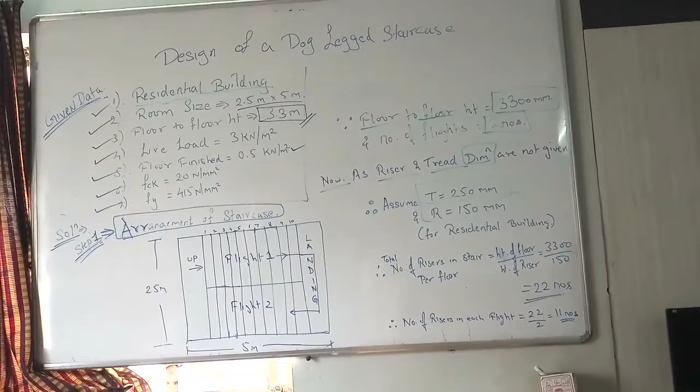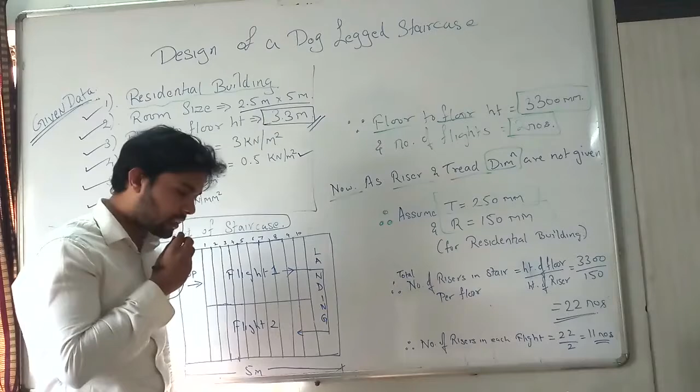Previously we discussed the basics of design of dog-legged staircase. We are preparing for two types of staircase in our syllabus: the first is dog-legged staircase, and the second is open well staircase. We have already discussed the dog-legged staircase and its design steps, including what formulas and steps are required.

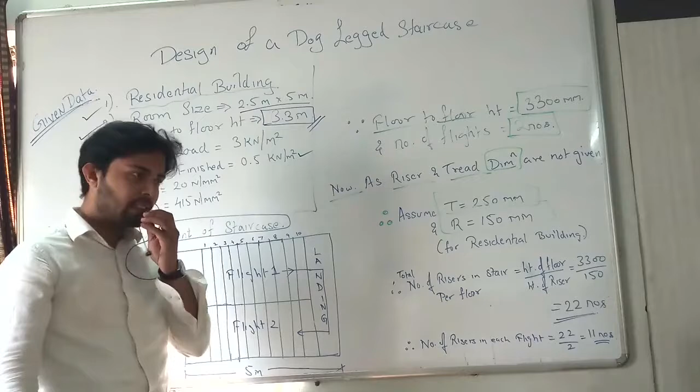A staircase consists of two flights, separated by a landing.

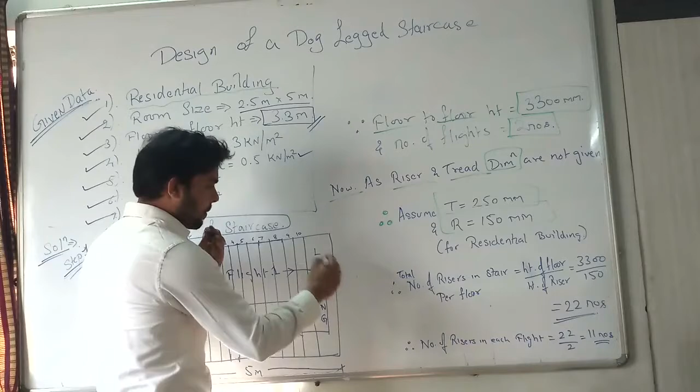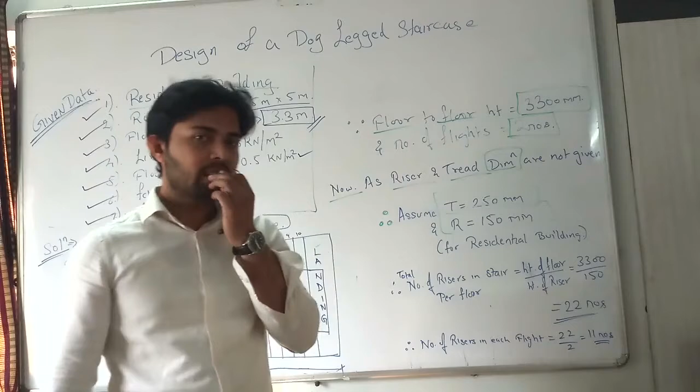Now one more thing about dog-legged staircase: both the flights consist of equal number of steps, whereas in open well staircase the conditions are different. So in dog-legged staircase, remember: it consists of two flights, Flight 1 and Flight 2, running in opposite directions, separated by a landing, and both flights have an equal number of steps.

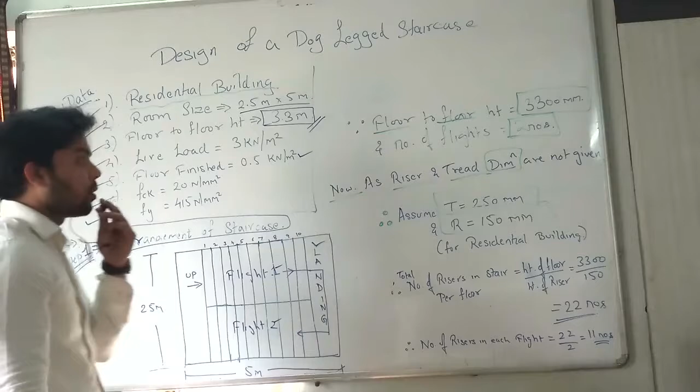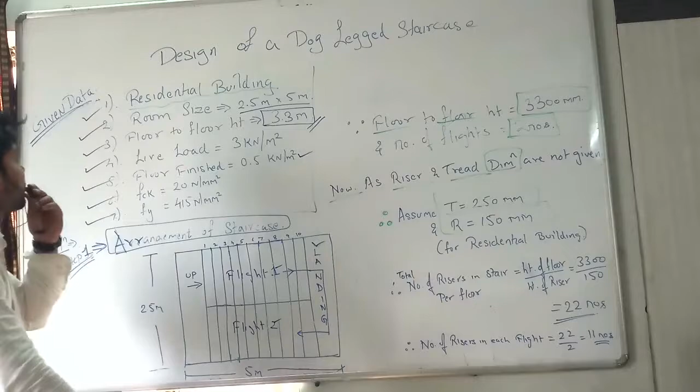Since we have already discussed the steps before, we will directly move towards the numerical for design of dog-legged staircase, for which I have already entered some data. Let's go through it one by one.

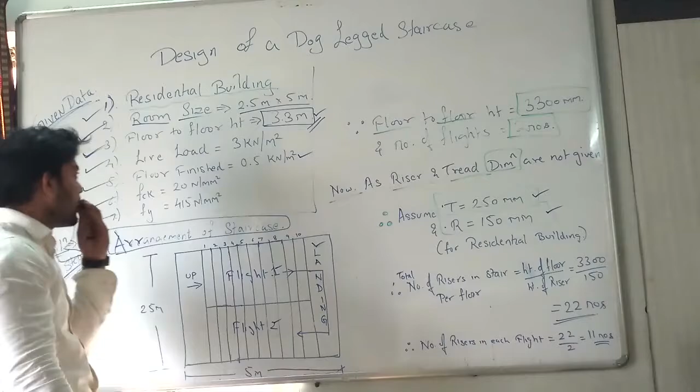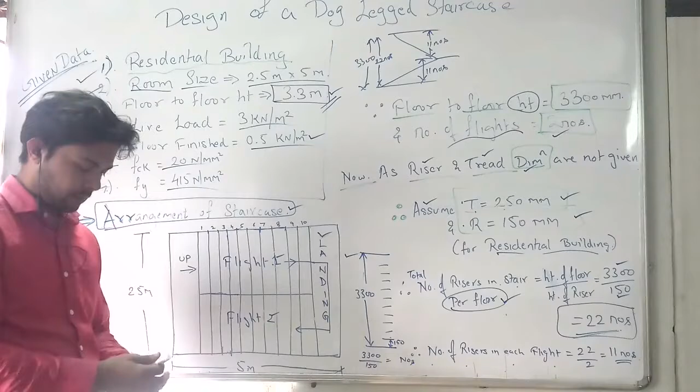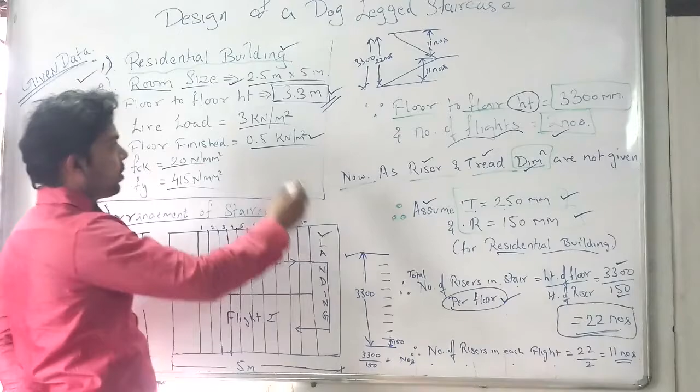Okay students, previously we were discussing the numerical over dog-legged staircase, for which I told you some given data: it's a residential building with room size given as 2.5 meters by 5 meters, and floor to floor height, which is the same for every floor, is 3.3 meters or 3300 mm.

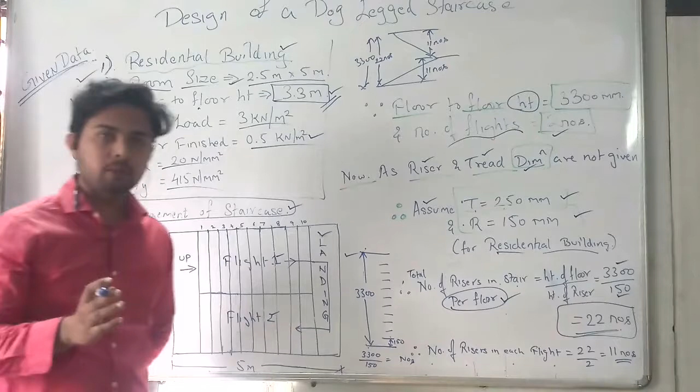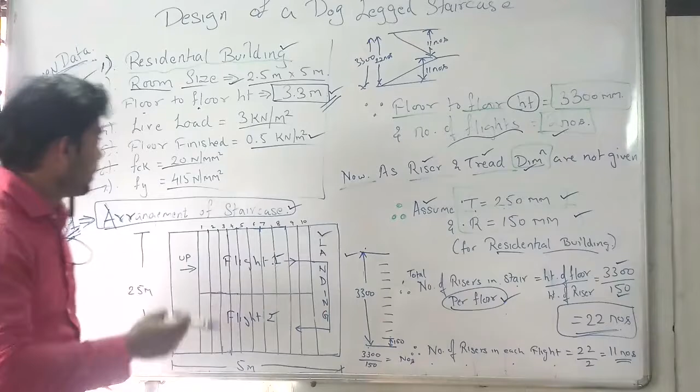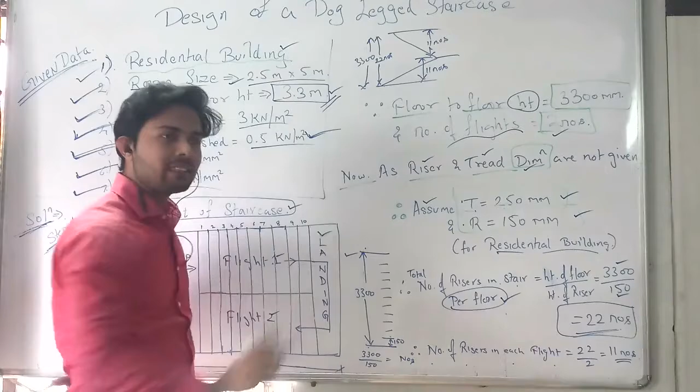Then the floor finish value is also given to you. If you don't get it in the numerical, you will have to assume it as 0.5. Floor finish is a finishing material provided to the staircase, like a tile - that is the floor finish, the weight of floor finish.

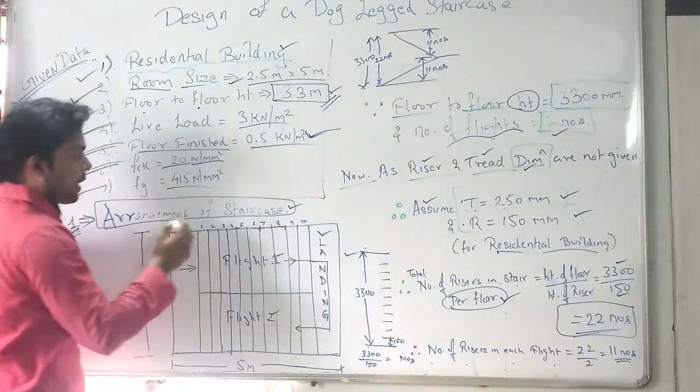Then another thing given to you is the grade of concrete, that is 20 Newton per mm square. The last thing given is the grade of steel, that is 415 Newton per mm square.

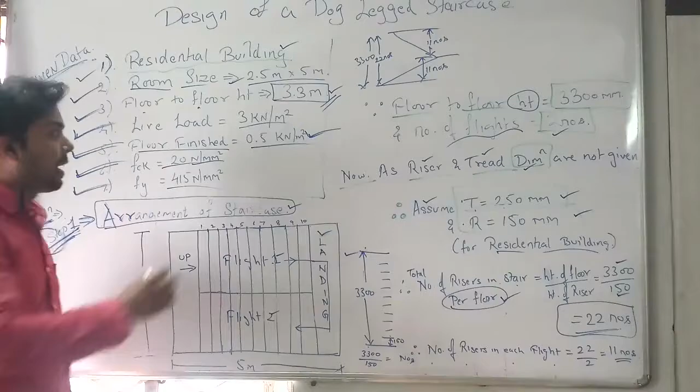Moving ahead, let's directly switch to the solution of this design. The very first thing you'll notice is that you are not provided with the number of steps required in the room - that is not given to you, so you will have to identify it.

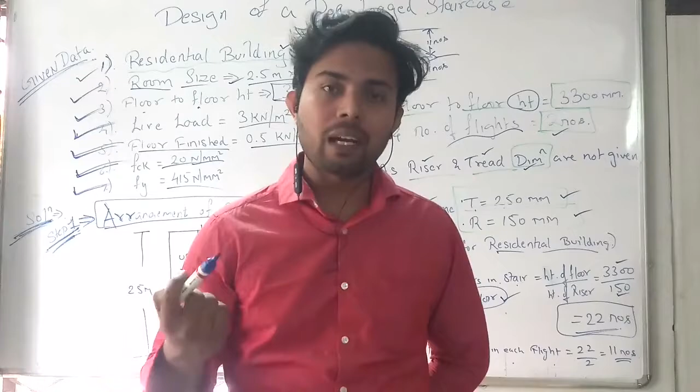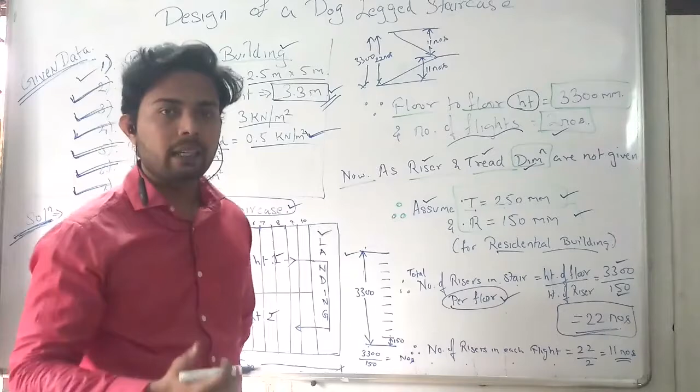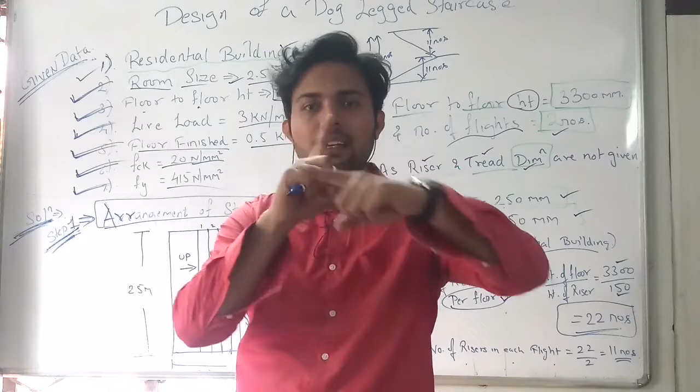You will have to analyze it with the help of two things: first is the room size, and second is the floor to floor height. All of you must know that dog-legged staircase is provided with two flights, separated by a landing, and both flights carry an equal number of steps.

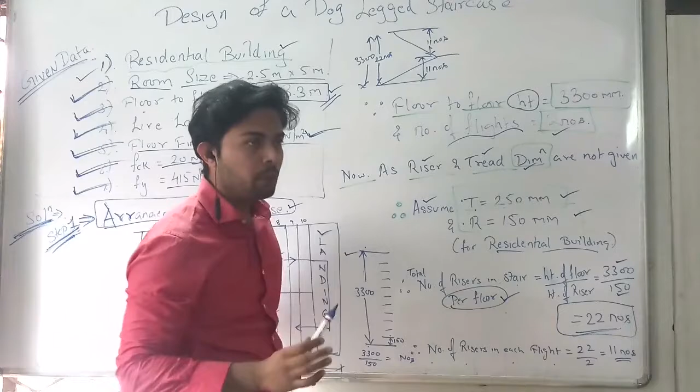You can see this is the floor to floor height where you are providing a dog-legged staircase. So a dog-legged staircase consists of two flights separated by a landing, and both flights consist of an equal number of steps. I hope this is clear to all of you.

So with the help of this, first we determine the floor height and number of flights.

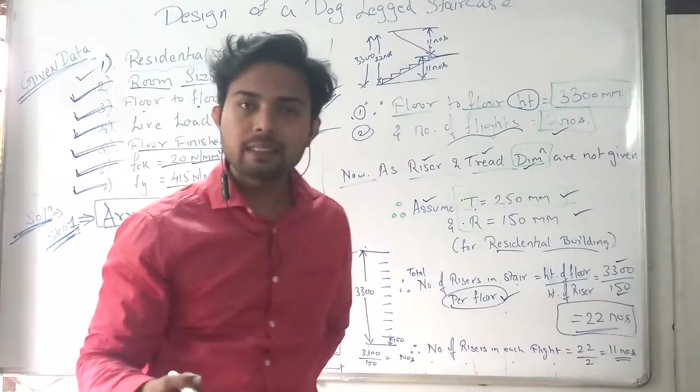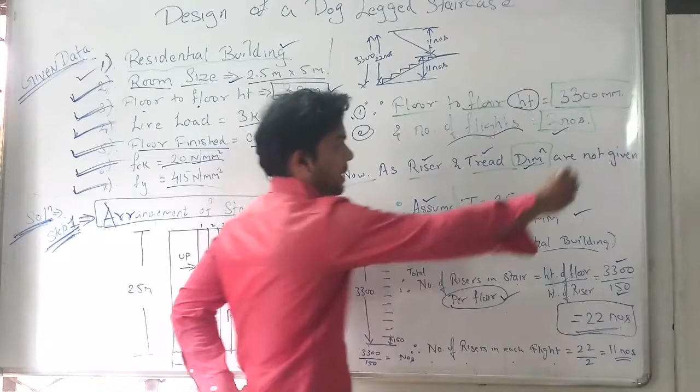So you all must be knowing that there will be only two flights in a staircase which is dog-legged type. The floor to floor height given to you is 3300 mm, and the number of flights is 2.

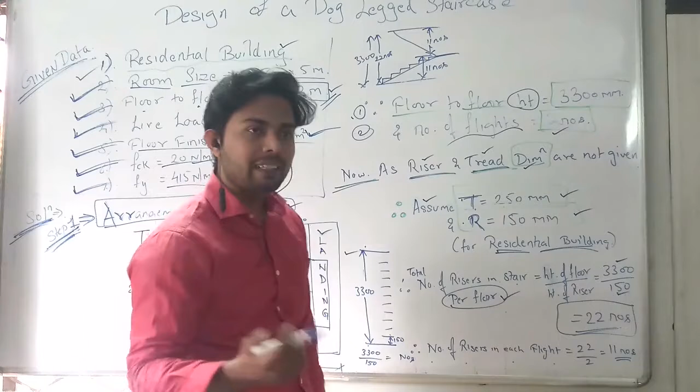Now you are not provided with the dimensions of riser and tread, for which I have already told you from IS code what would be the range of tread and riser for a residential building. You will have to memorize it. If you want a single value for tread and riser in a residential building, memorize that tread is 250 mm and riser is 150 mm, specifically for a residential building.

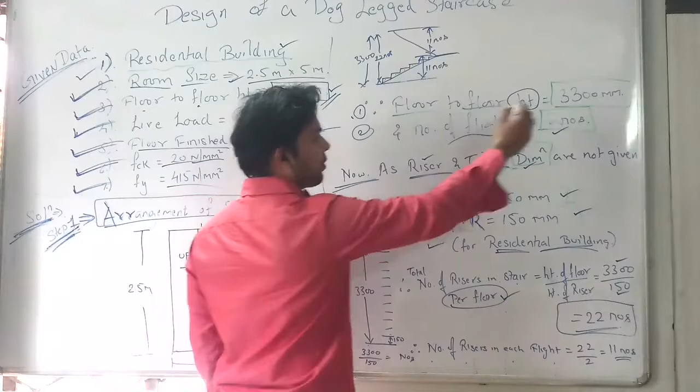Now let's move ahead. You need to determine how many steps will be there in a flight. You are not known with it right now. So with the help of the value of tread, value of riser, and the height of floor, you are going to determine how many numbers of steps will be there.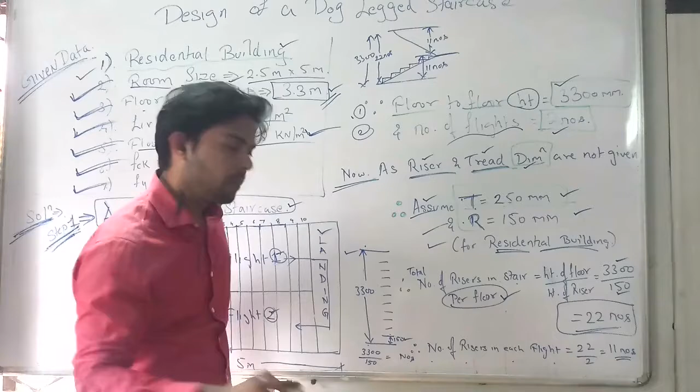You are taking the total height of a floor and the height of one riser, because how will you achieve the total height? With the help of a riser. You are lifting your legs to reach upward with the staircase, so the height which you achieve will be with the help of riser. So the height of number of risers will be equal to the total height of a floor.

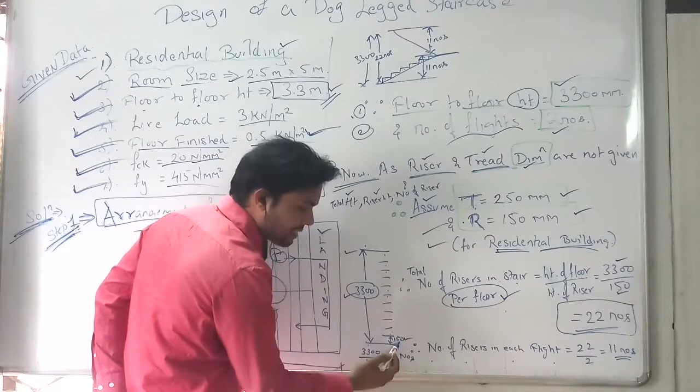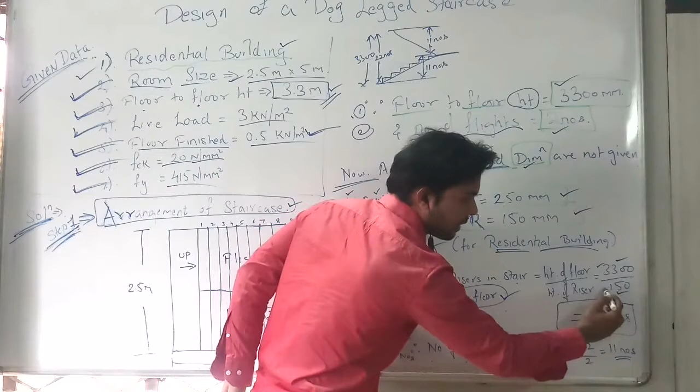So how will you determine the number of risers? If you are known with the total height and the riser height, then you can easily get the number of risers, simply by dividing the total height with a single riser height. Dividing this total height with a single riser height, you will get the total number of risers in the stair in the floor. I hope this is clear to all of you.

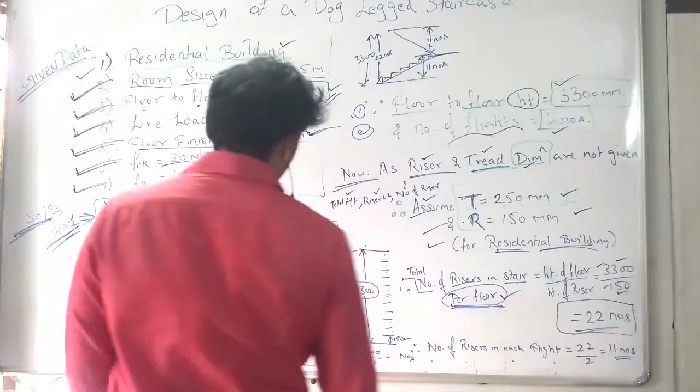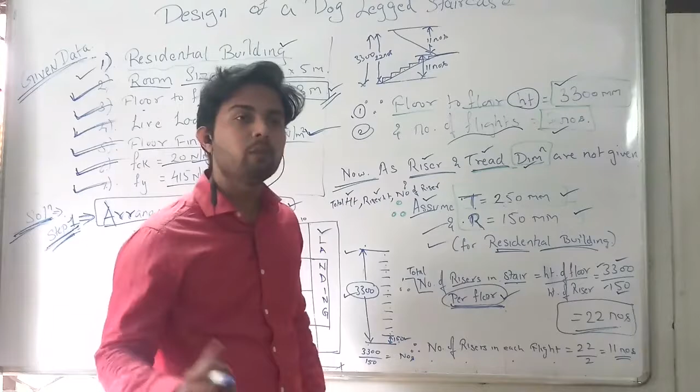Now, let's move ahead. As you have determined, the total number of risers is equal to height of a floor divided by height of a riser: 3300 divided by 150, the value you have attained is 22 numbers. 22 numbers is the last step, the last riser will be of 22 number.

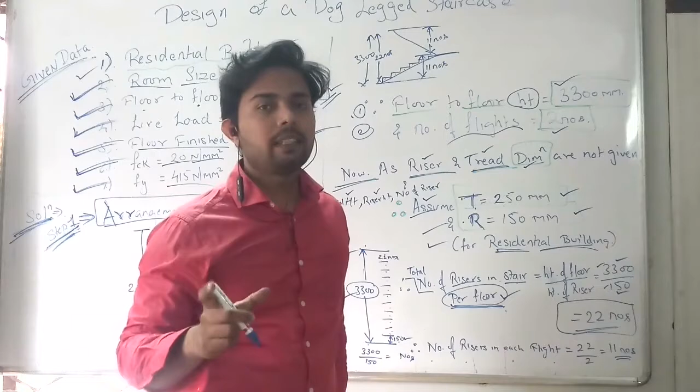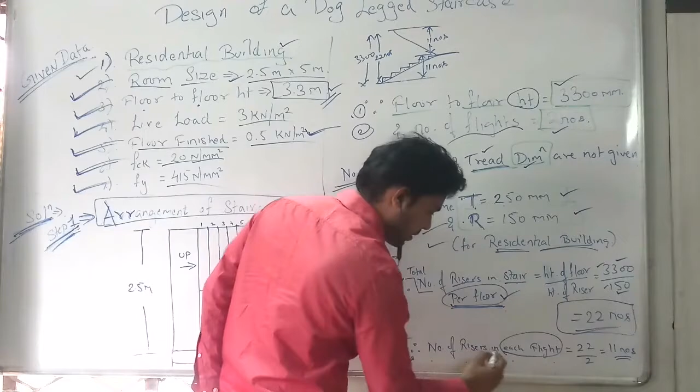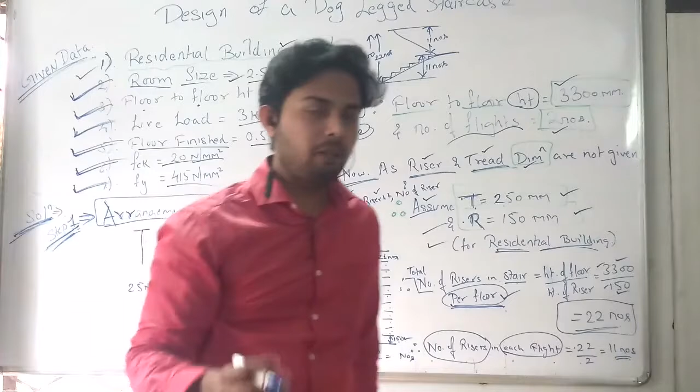So how are you going to arrange the steps in two flights, and each flight will carry the same number of risers? So simply, for each flight, number of risers will be half of total, half of total is 11 numbers. That means each flight will carry 11 risers - first flight 11 risers, second flight again 11 risers.

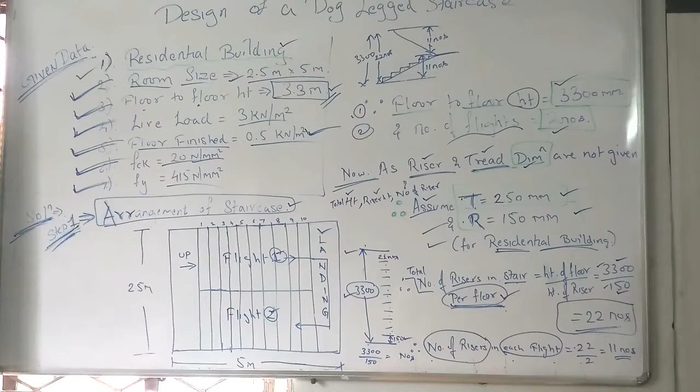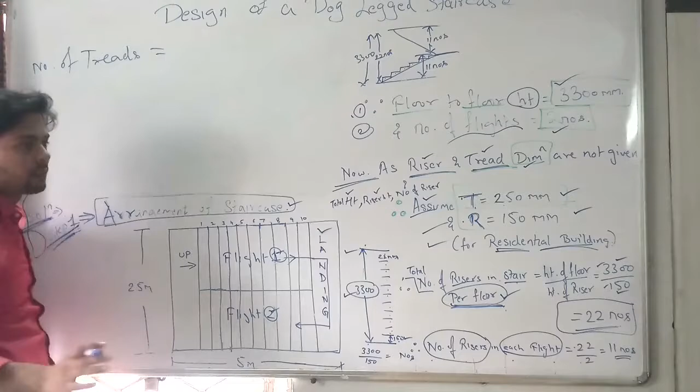Tread. Number of treads. Number of tread is always one less than the number of risers.

See, if I am adding one flight over here: this is first riser, first tread, second riser, second tread, third riser, third tread, fourth riser, fourth tread, fifth riser, fifth tread, sixth riser, sixth tread, seventh riser, and then if I am providing a landing over here, there will be no tread. So after the seventh riser, there will be a landing. So in this flight you have 7 risers and how many treads?

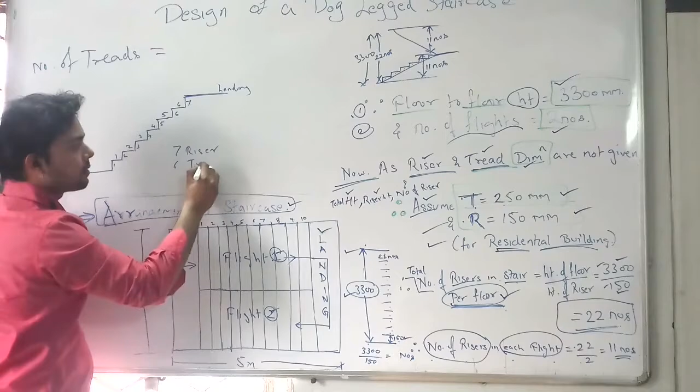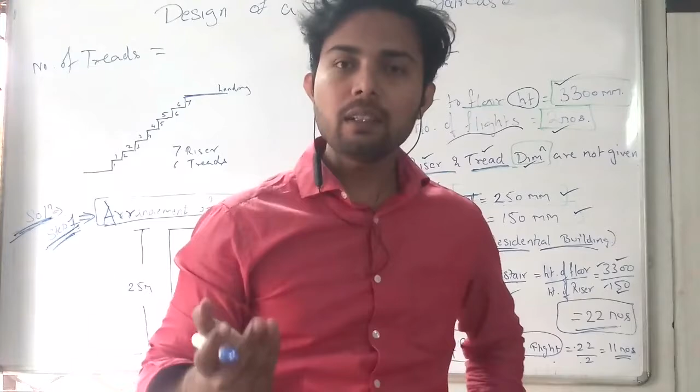6 treads. It happens in the actual case that as much number of risers you are having, the tread will be one lesser to it. I hope this is clear to all of you.

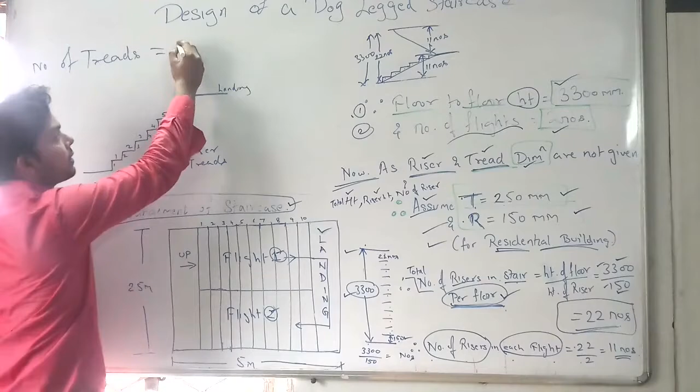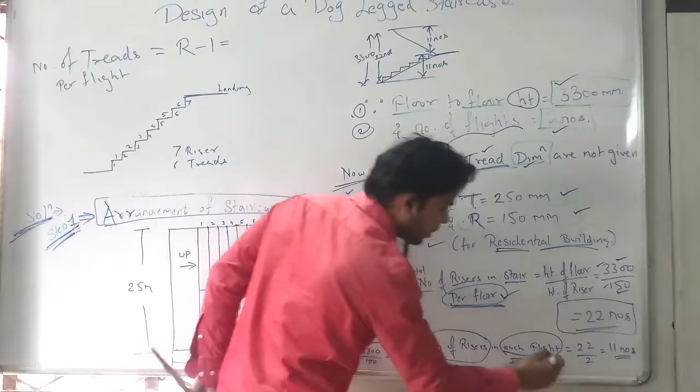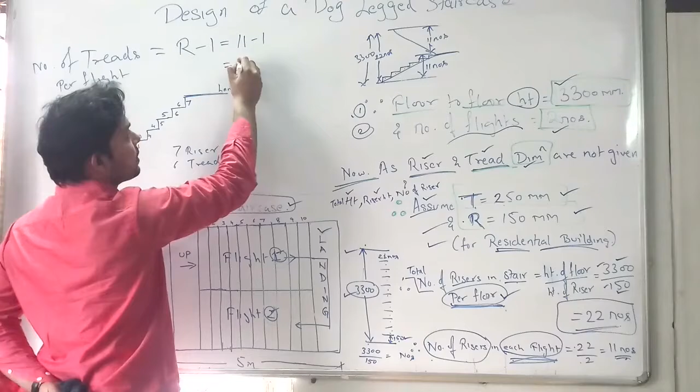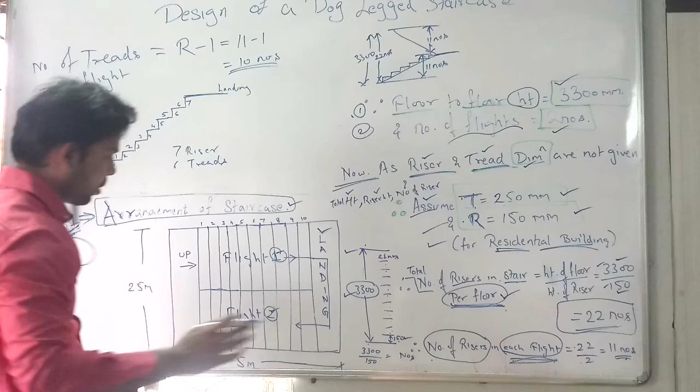So number of treads is equal to risers minus 1, per flight, because we are now working per flight. So number of treads per flight is equal to risers minus 1, that is 11 minus 1, that is 10 numbers. Now you will add 10 treads and 11...